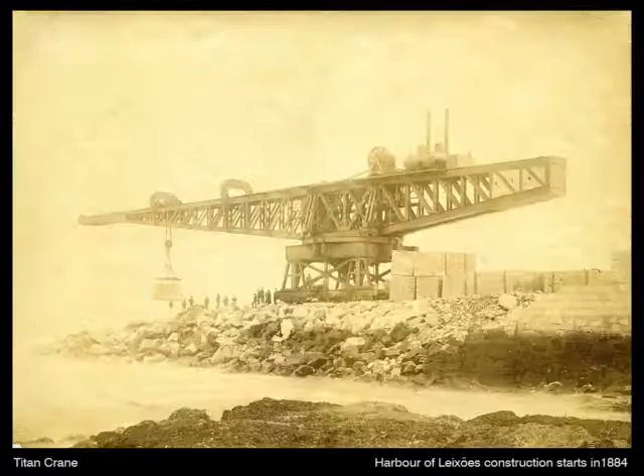So there was a plan to design a new harbor in Porto, meant to be located on this exact place to profit from the natural rocks that already existed there. They built the Leixões harbor at the end of the river Leça, using a magnificent machine called the Titan. In 1884 they started building the harbor, practically at the same time the bridge was being built over the river, so a lot of things were happening at the moment in the city.

There was a company that traded wine and exported it to the Portuguese colonies in Brazil, India, Angola and Mozambique, called Menes and Companhia, which was among the first trading wine companies to come to Matosinhos, closer to the new harbor, so they would be closer for their business of export and import.

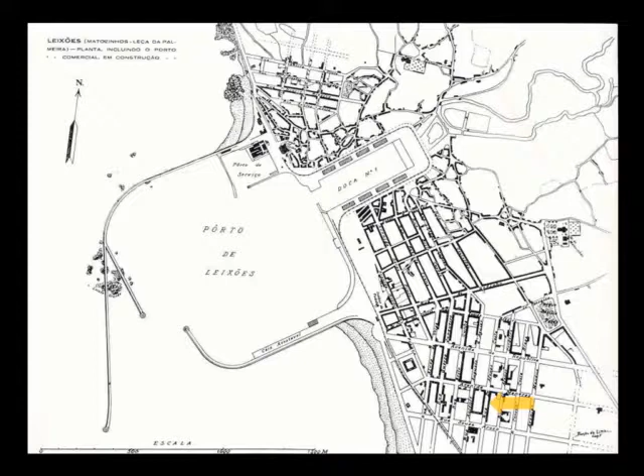In this old plan, you can see this was the river Leça, the new harbor, this is Leça, this is Matosinhos. As they built the new harbor, they also planned an industrial space near it so factories could be closer to the ships. This one is the Real Vinícola, one of the first to be built on that new location.

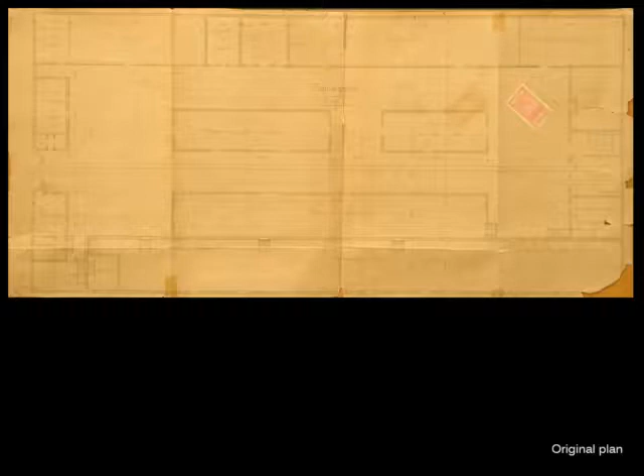This is the original plan, where you can see the train lines that would come in and go out. This would be storage and store. This would be where they would load the wine, and this is where they would unload the wine. So the train would come and unload the barrels, and then would go there, and to go out, they would load and come out.

This here would be the administration house. Over here was the storage of the barrels of wine. Over there was the storage of olive oil. Here was the place of the train. This was the mechanical space for maintenance of the train. Over here was where they built the barrels for the wine, and here was a storage of wood. This was a technical room with machines. This was where the people would have lunch, the canteen. And over here was the carpentry and a wood storage also.

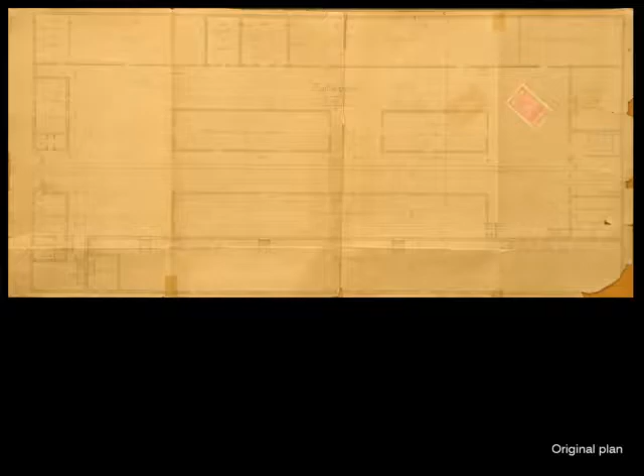Here we can see how this worked. This was one of the spaces in the middle where they would load and unload the barrels of wine, and this was that long building where they stored the barrels.

This is the upper floor. On the ground floor, the structure is a steel structure, because on the upper floor there's also a very heavy load because of the barrels. So on the ground floor they have a steel structure, and on the upper floor the roof is a wooden structure.

This was the place where they would bottle the wine and put it in boxes to send it abroad. And this is where they would build the barrels for the wine.

This is the workers. At the beginning, the original project, there is this house and the main storage building, but this was built between 1897 and 1901. In 1903, they made an expansion of this house and built another small building that linked this house to the main storage building.

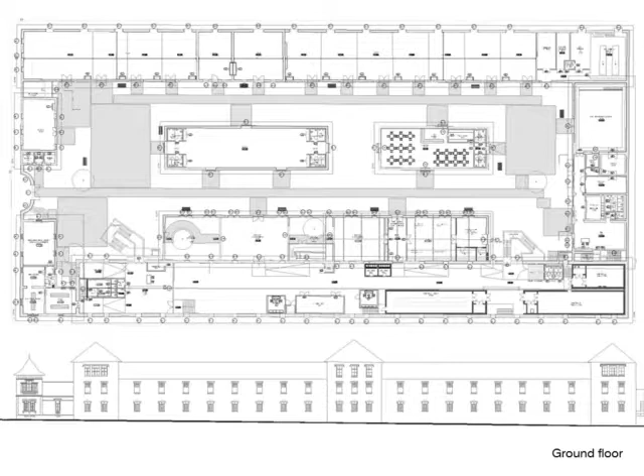On the ground floor, we have this small foyer, which is defined by these boxes, and on this side we will have the library. This will be the exhibition space.

Here there will be these movable walls that will create temporary spaces for a conference or a specific exhibition that needs to be in smaller spaces. On the other side, there's the administration and working spaces.

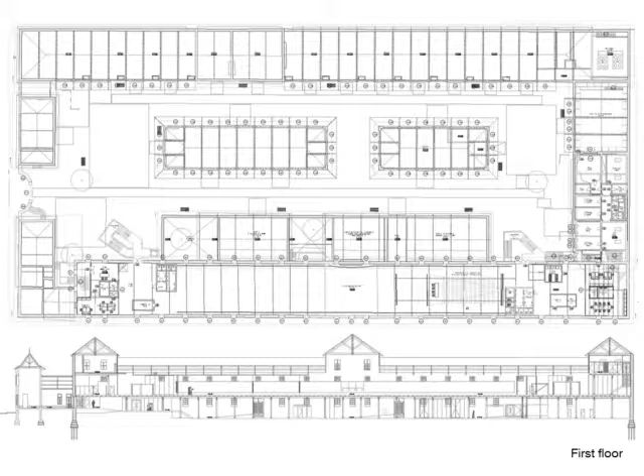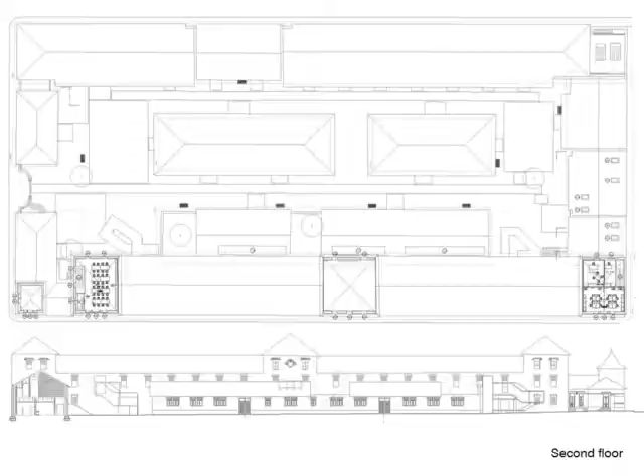On the upper floor, there's the main room of the library and the working spaces of the administration. Here we can see these two new volumes of the stairs, and the space left for the trees that will make the courtyards. These are the only images that I have of those two new volumes. And that's it. Now let's wait to see what happens.

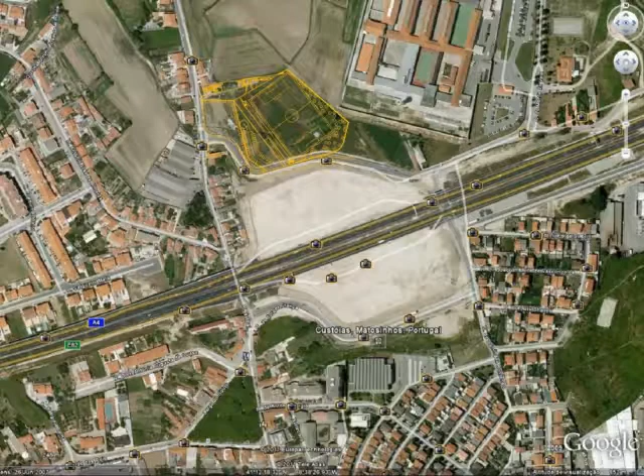This is an aerial view from Google where we can see the new road. These two spaces here are for the gas station. The plot for the new football field was like this. It was so small for the football field that I really didn't have the chance to choose how to place it, because it would only fit like this. This was the only way to make it fit inside the plot.

One of the difficulties was that the site was not leveled. It was like more or less 10 meters from here to here. So the question was how to place a big platform for football in a place which is not leveled.

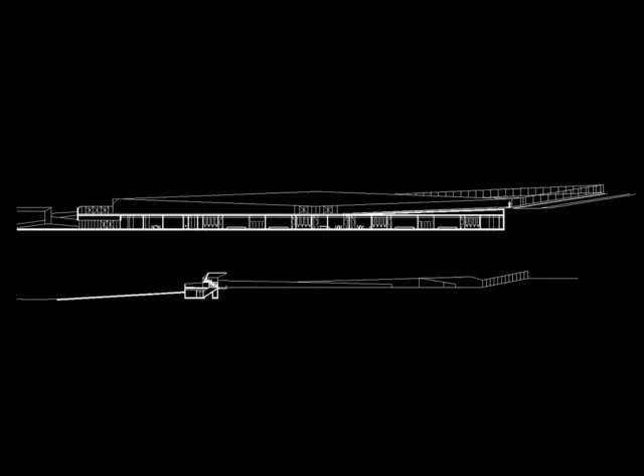So the idea was to place it at the middle, and profit from making the installations below and the stands above. People could come from here, having two entrances, one on the upper level and another on the lower level. Another thing was that many small football fields here in Portugal always have the stands above the installations for the players, so we have this big volume, and the idea was to push this to the front and create an access for people to enter on the upper level.

The plan: this is the entrance at the lower level, for the players, and this for the public, and then they have access to the upper level to the stands. So the public will come here and get to the stands, or otherwise they will come from the upper level access and go directly to the stands.

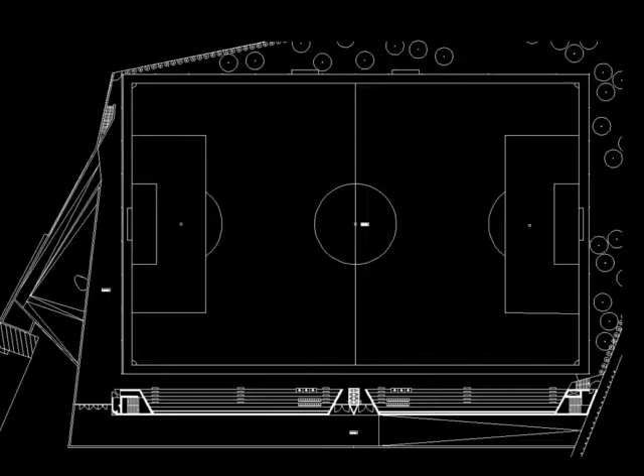This is a general view of the stadium. This is the parking lot for the cars, the access on the upper level, and entrance to the stands, and the access from the lower level. This is the entrance from the lower level.

It's another view. This is the stand. Originally, the stand was to be uncovered, but in the middle of the construction, suddenly they told me we had to cover the stand. So it was not very easy to find a way of covering it in the middle of construction, but I think the final result is not so bad.

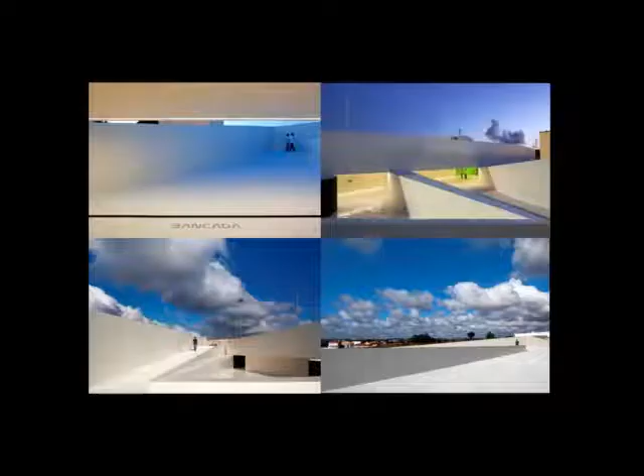Here you can see the upper level. This was used to make a garden around the fields. This is the access from the public to the stand on the higher level. They enter there and come up from here. This is the toilets for the public. Another access.

This next project, 500 meters from the football field, is the Custóias Civic Center. It's in a public space with a triangular shape, a square with a triangular shape. This is the empty plot. Over here is the house of the priest. And this is the Civic Center new building.

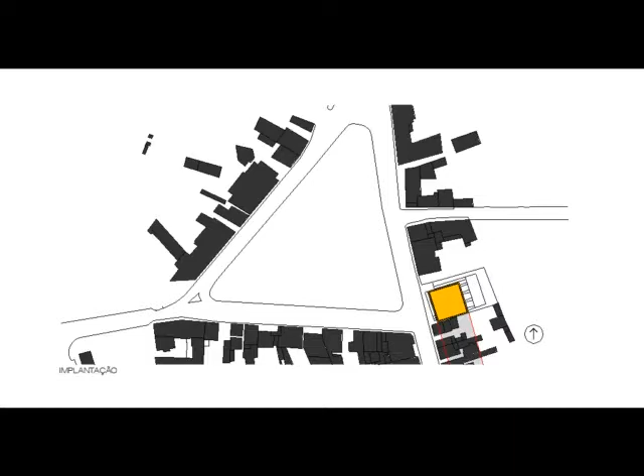I was experimenting with a lot of forms and shapes and locations, and at the end, the shape of the building is only to fulfill the regulations implemented by the city. So this had to be the alignment, the new alignment of the houses. The building follows this alignment, and this is the maximum depth. So this was the depth of the building, and to leave an access on the side, we made the same depth and the same width, so it is a perfect square.

The plans are also very simple. This is the entrance level with a reception. There's a corridor that divides the services on this floor, and this is like a room for the elder people, almost like a library where they can spend some time and read the newspapers and some books. Here is the access to the upper floor, where we have two meeting rooms and a multimedia room.

At the moment, this is completely different. The functions are completely different, and in the basement there's only storage rooms.

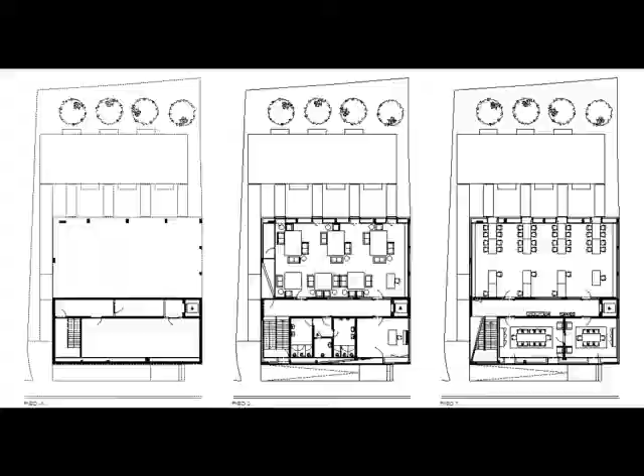This is one facade, and this is a line by Goethe that says, 'Architecture is petrified music.' This facade was not inspired by this phrase, it has nothing to do with it. Just at some point I was reading this and I remembered this project, and I looked at some partitures and some drawings by Beethoven, and I think I saw some similarities, but maybe it's just my imagination.

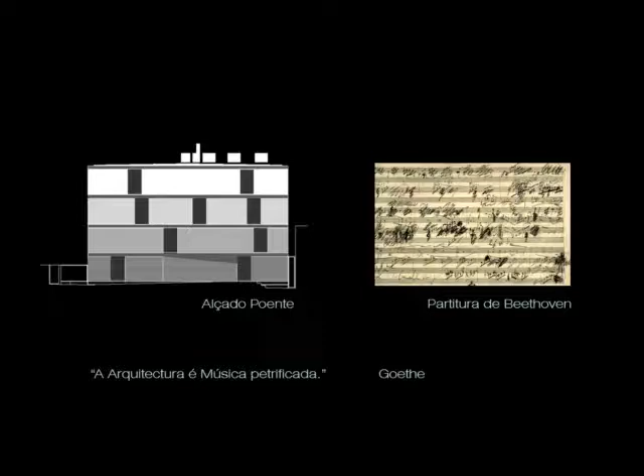But I liked it anyway. And there was also Xenakis, who was an architect and a composer who worked with Le Corbusier, that said almost the opposite, that music is mobile architecture, and his music work is also like this. It's quite different from Beethoven's, it has nothing to do with it, but I don't know, I just thought I found some similarities and I found it interesting.

This is the building. So over here was a very plastic way of putting the windows. The element is always the same, according to the interior spaces. There was this need of bringing light to the inside and also to compose the facade, and the result came as this one. This is the side entrance in the plot.

Now, the front facade, the windows are a little bit back relating to the facade, because this is south, so we wanted to protect it a little bit from the sun. And on the other side, this is north, the windows are along with the facade, so we can have more light inside.

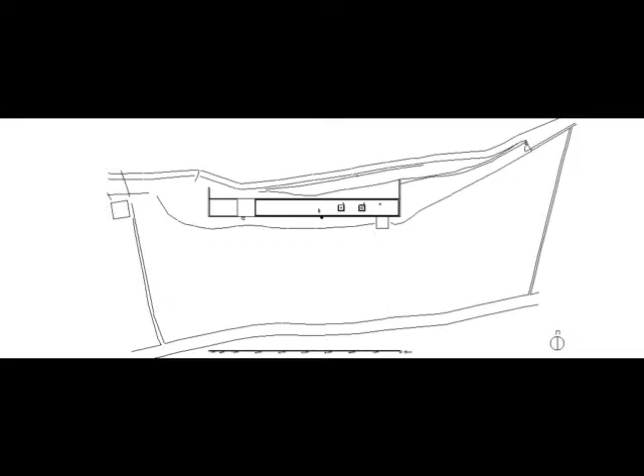So I was a little frightened of the consequences of placing a volume in the natural space. In the north of Portugal, as in Douro and other places, on agricultural land they have these stone walls that make platforms. The idea here was to make another wall and let it be consumed by nature and plants over time, covering it. So the roof is a green roof, and the house is on this side, with a swimming pool on the opposite side.

For the plans of the house, I researched local and old typologies, and found this one in Guimarães, also in the north of Portugal, not far from there. This is a farmer's house, and what I found interesting is that it has this veranda space that links all the other spaces of the house.

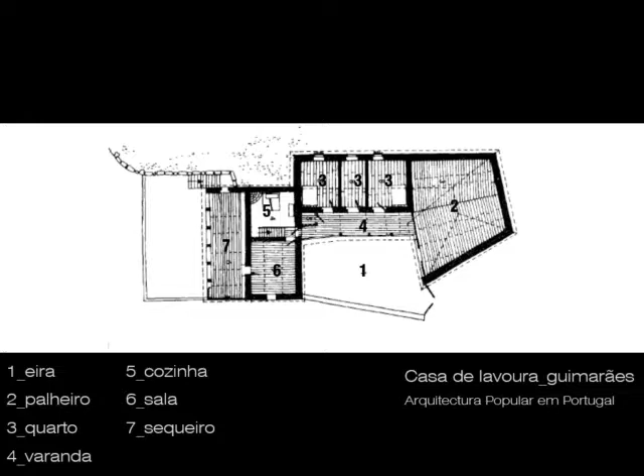One thing I wanted, and this happens in all my projects, is to not consume a lot of space in circulation areas, corridors or anything else. So I try to minimize the area used for circulation, to make the spaces where people live as big as possible.

So I translated that typology to the house here. We enter on the lower level, which is a garage and storage. When we enter the house, we get to this hall, but then this veranda is what links all the spaces in the house: the living room, the kitchen with the dining room, which is also very typical in vernacular architecture.

People eat where they cook, and I think it's a really nice choice, because you eat where the smells of the food are, and the atmosphere is quite special when we eat at the same place where we cook.

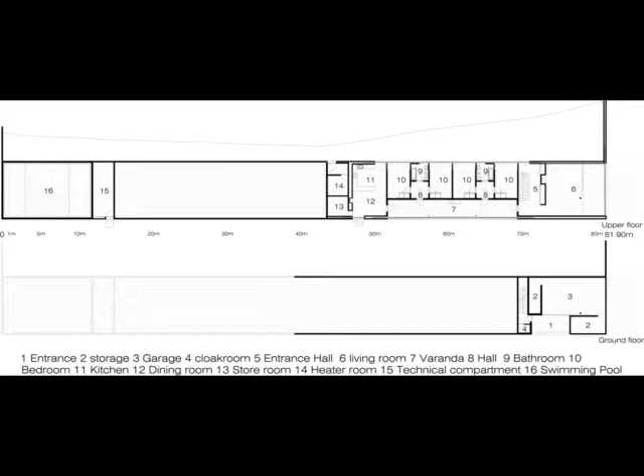These are like two similar modules with a common hall, a room, another room, and a bathroom. They are set away from this terrace so people can circulate without losing their privacy. This is again the roof plan with the swimming pool on one side and the house on the other.

By the time I started designing this project, I was still working with Eduardo Souto de Moura, and I was terrified of designing too much like him, because when you work in a place like his office, you get used to designing like he designs, since it's his project. So here, sometimes the idea was only to make it different from Souto de Moura. Some friends said you can't make things just because they're different, but in this case I wanted it to be different, it couldn't be the same. Even though I think the house has some connections with Souto de Moura's work, it reminds me a bit of the house of Bom Jesus, that base, and then the other volume above.

In this case, the windows retract inside the wall, so you can open up and have a completely open space, as well as in the corridor over there. You can see this veranda can be closed in the winter, like a winter garden, and in the summer it's all open, as an exterior space.

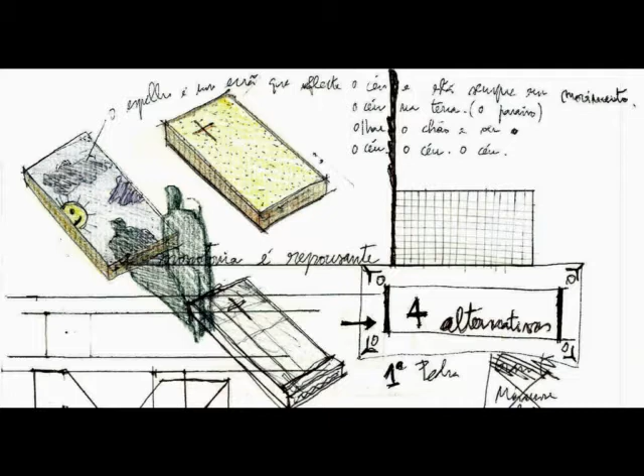The amazing thing for him was that when we look at the mirror, we are outside of ourselves, we see ourselves outside our own body. In this case, the mirror was not for us to see ourselves, but to see the sky. So when looking down, we would see the sky, and so in a symbolic way, the person who died is in the sky.

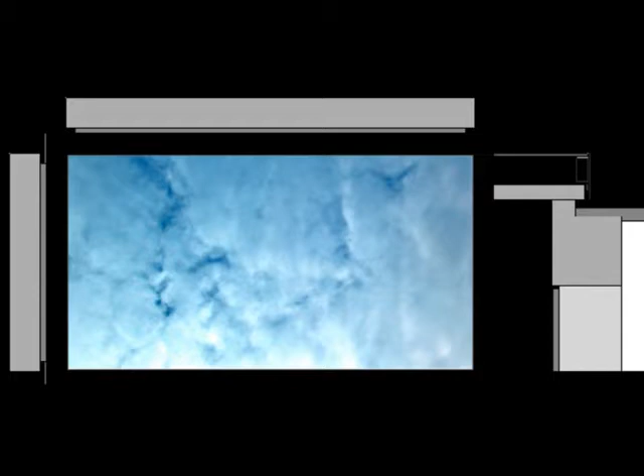This is the detailing. The idea was to have this metal frame with a mirror glass above, but at the end, the detailing was a normal grave with a stone, and above the stone, the metal frame with the glass.

And it works best this way. The grave works really well when it's windy and cloudy, because we see a lot of movement, and it's quite impressive.

I also have a small video for it.